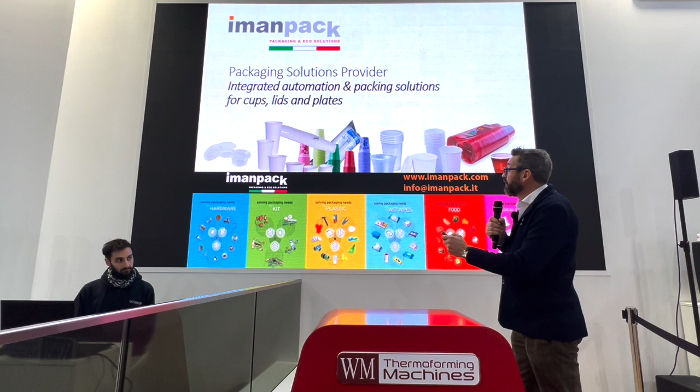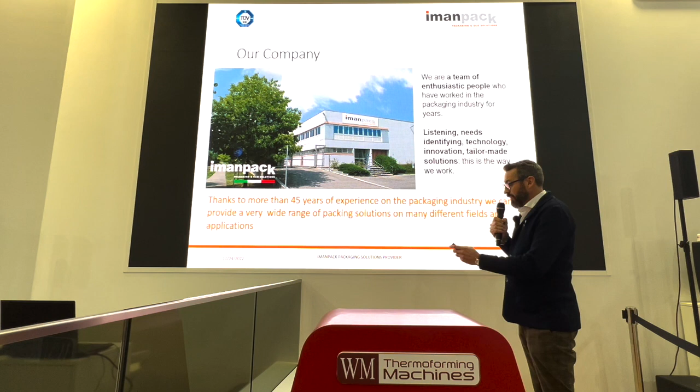We have quite big experience on packaging fields. We produce machinery for packing. We do about 60 different machines and we have more than 45 years of experience on packaging industry. Very wide experience in different fields, from food to plastics, cosmetics, wet wipes, hardware industry, automotive, chemicals, and so on. We are really verticalized.

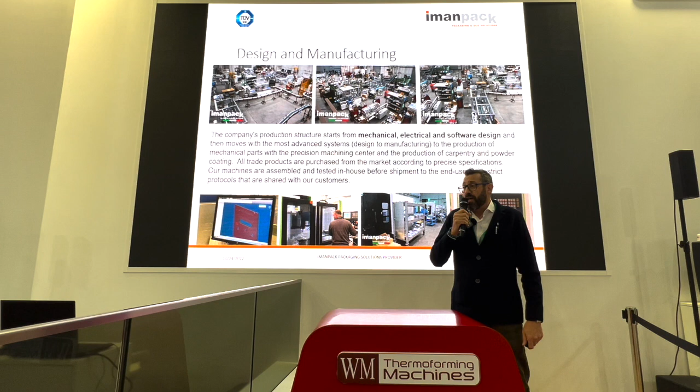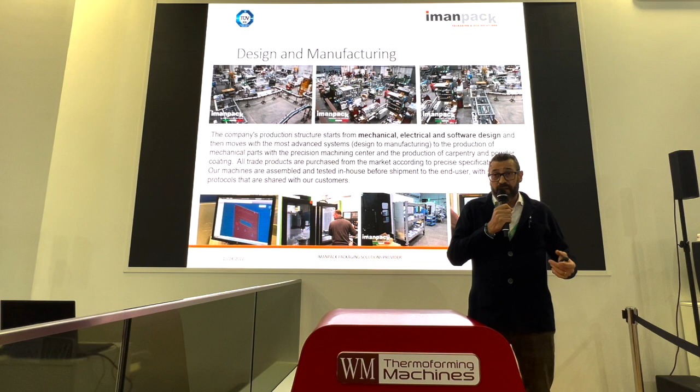It means that we do from designing to manufacturing. We have manufacturing facilities, CNC centers, laser cutting, bending, painting. And we integrated many technology related to manufacturing and design, directly from 3D models to design to machine with CAD/CAM systems. This is the way to improve our quality, to reduce the time and lead time of the parts and controlling them for higher quality of the parts, or quick feedback, because we do many customized solutions.

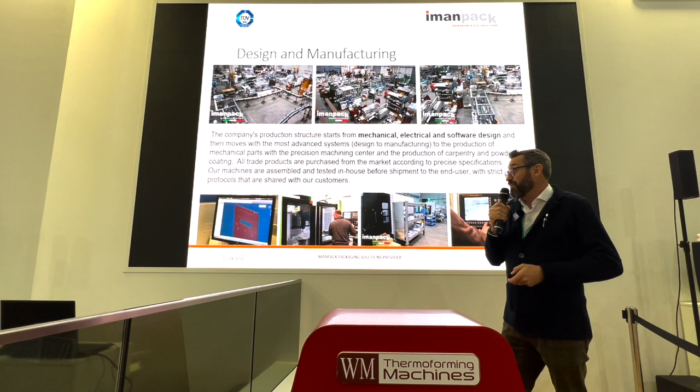We are ISO 9001 certified, following strictly related procedures.

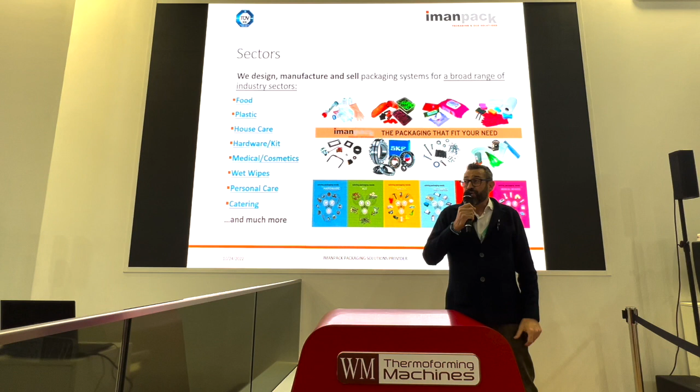And these are some examples of specific industry that we are involved in. So from food, plastic, house care, hardware kit, medical, cosmetics, wet wipes, personal care, catering, and much more.

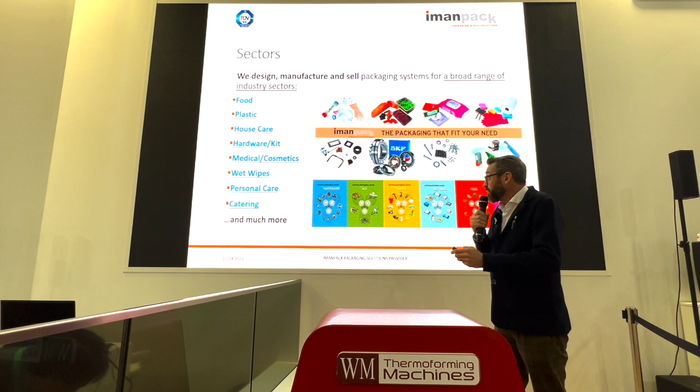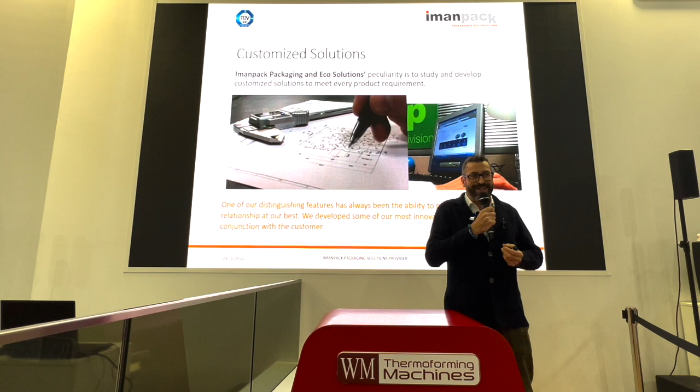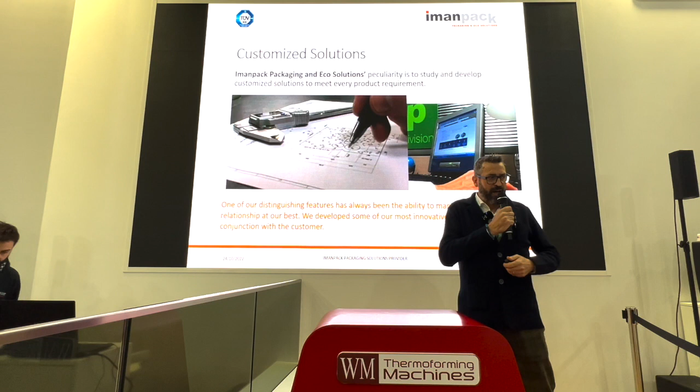As I told you, we do many customized solutions because after 45 years of experience in different fields, there are some standard solutions, but packaging at the end starts from the product itself, and then we study a specific solution related to our customers and their needs, so we work hard around the product itself, how it comes from the production lines up to the full end of line and palletizer.

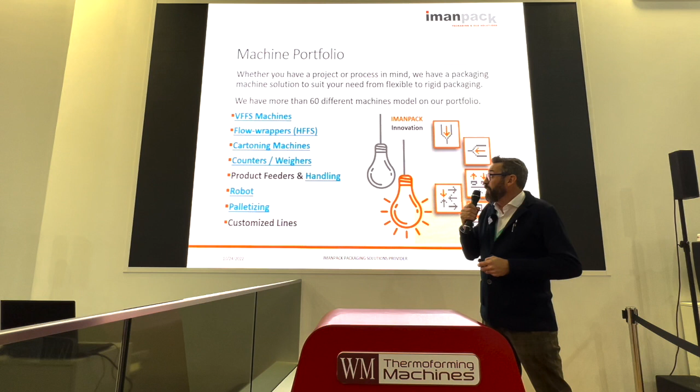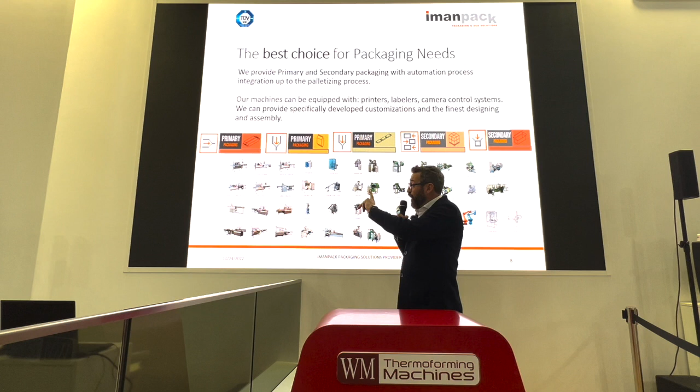So we produce vertical fill and seal machines, flow wrappers, cartoning machines, counters, weighers, all related to product handling, feeders, robots, and palletizers. These are pictures of the whole range of machines that mainly go to what is called primary packing, that can be with flexible film, to secondary packing with cartoning, up to the palletizer.

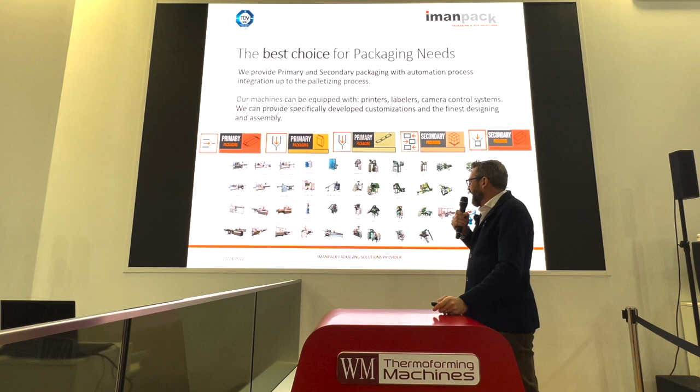This is some example of names that we serve from industry, different industries.

We have in our network 58 agents around the world, and we spread our presence in the market very wide.

Imanpack headquarters is in Italy, in Schio, Vicenza. Then we have one branch in France, and then we have Imanpack North America. So 58 countries, 2 branches, and then of course there is a specific department for process and after-sales service.

For technical support, scheduled maintenance, information, and so on, after-sales service is particularly focused on our machines because they need to work in industry 24/7 always, so it's important to get the right feedback on the machine with planned maintenance, technical service, upgrades and options, and technical expertise that gives suggestions for maintenance and timely interventions.

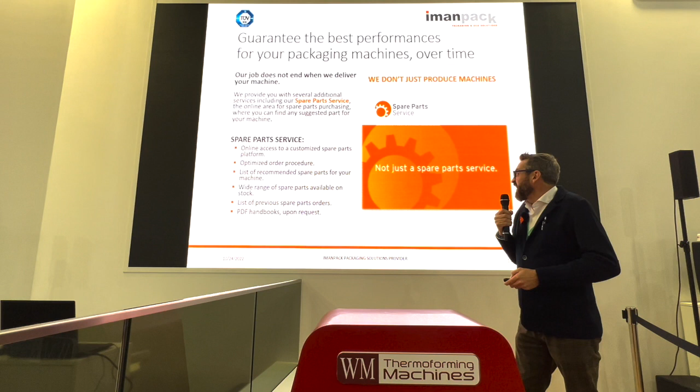And we have also a shop online on our website. Every machine is connected through Ethernet ports and is connected to our service center. And then the machines are equipped with a QR code. When you scan it, the customer can go on a specific web page where you can see all the spare parts available and can ask for a specific intervention dealing with our experts. That's a resuming of the spare parts service platform.

What we say is we have what you need because the variety of application that we have gives us the experience to suggest you a possible solution. This is why we call also packaging and eco-solutions.

So again, our intervention is on primary packing, secondary packing. We can do different kinds of packing like singular, multiple, working with different materials, different films from polyethylene to polypropylene, POF, and so on.

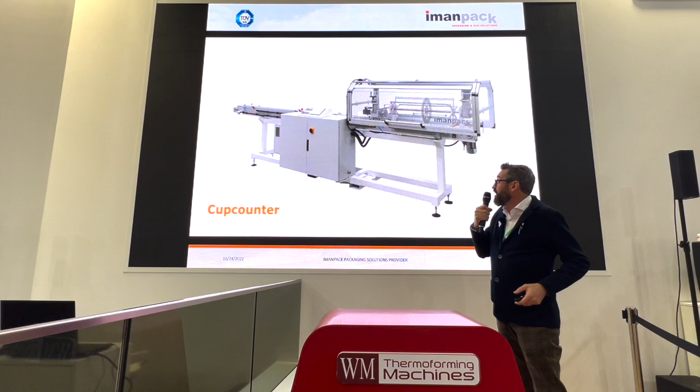That's, for example, the cup counters, so we can pass through all the products and count precisely the number that are into the bag, and connect with the further step, which is flow wrappers to make the primary bag. Machines are very flexible, wide range of products.

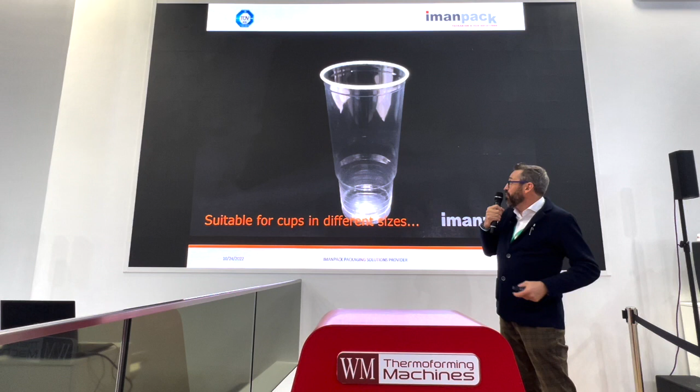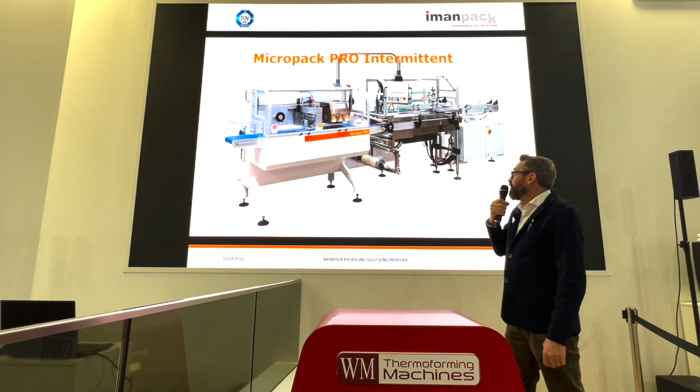Mostly we start even from very small product dimensions to middle-sized products. High-precision counting is requested in this market and is flexible for different ranges, different dimensions, very small ones and big ones for the cup, even different materials. This, for example, is the flow wrapper models, all servo controlled.

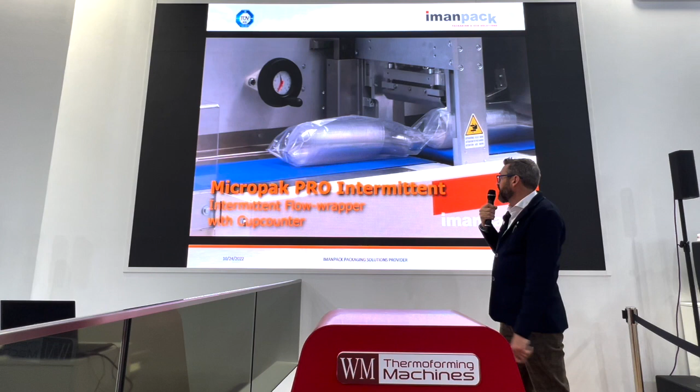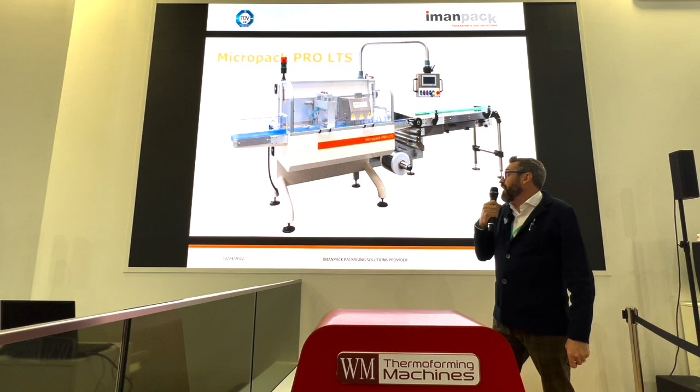Making the bags, generally flow wrapping is we wrap around the film, we seal it like a tube, and then we do the bag in transverse sealing and packing. That's the next stage of production capacity requested.

The principal concept is always the same flow wrapper system. We can work low density, high density polyethylene, we can work CPP or polypropylene. The matter of different materials means that we keep the machine with a specific sealing device for the wrapping material.

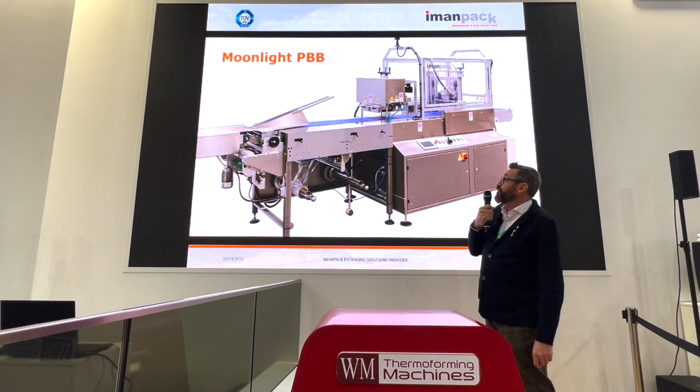Next stage is related to the higher speed machine that goes further up to 150,000 cups per hour capacity. We call it moonlight flow wrapper.

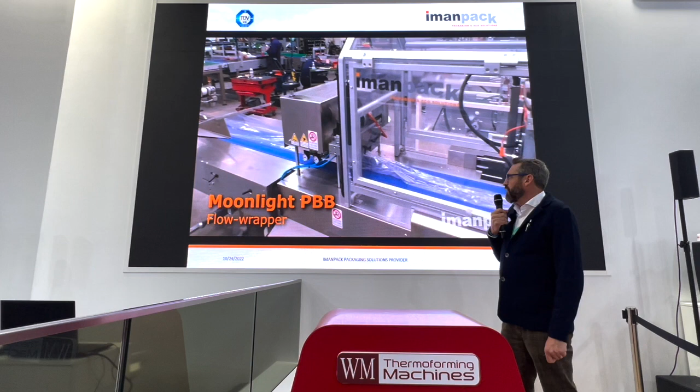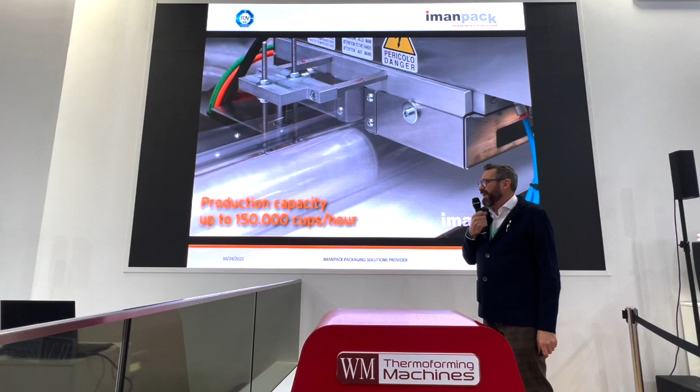Usually we work always from bottom feed machines, as you have seen, to carry the product, always connected to cup counters. The concept is always the same, it's just a matter of having different production capacity, so speed at the end.

You can see an application of 80 packs a minute.

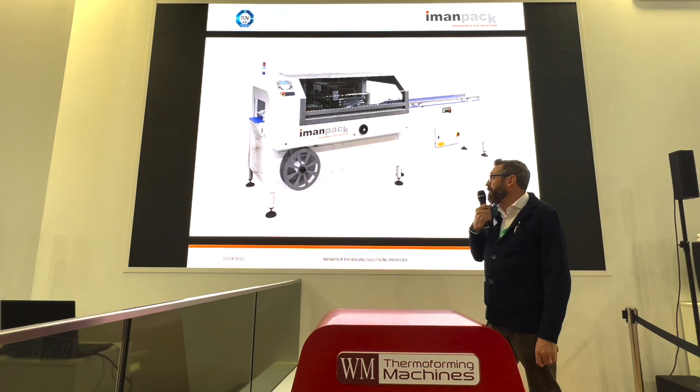Designing a line like this sometimes means also studying backup lines, so we do merging of more lines. This is another example of application, a wider machine for a bigger product, when we do multiple stacks together in the same bag, up to 5, depending on the dimension.

It's an angular packing machine, an L-sealer. So we can count precisely the singular stacks and then merge into 5 and make the bag accordingly as requested.

In some cases we also did POF wrapping material and then a shrinking tunnel to get a very, very tight pack.

Machines can, of course, be equipped with different options and devices depending on the project, depending on the line, going for multiple lines of packing. So we have stacker systems to merge different lines, like doubling width, and increase, for example in some cases, the capacity by having more cup counters on the same line to increase the speed.

So we are quite open and flexible to find a proper solution, and again, we have what our customer needs. We follow precisely the product, we take care of exactly what the customer needs at the end.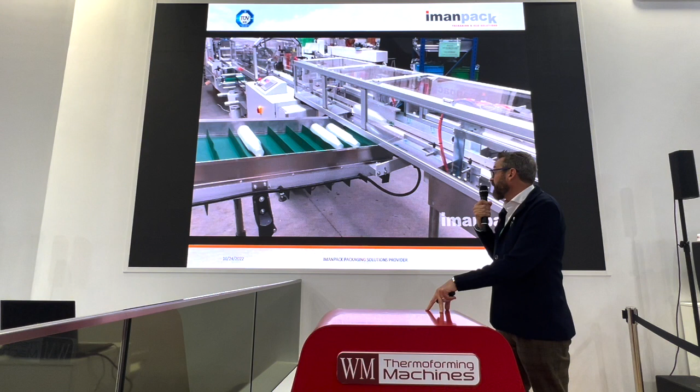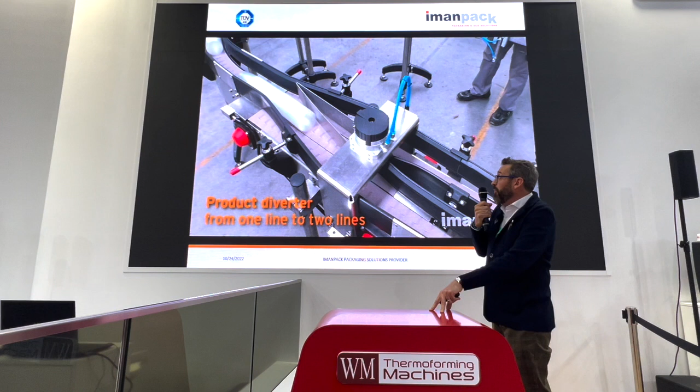That's an example of connection between different lines, main line and then backup line packing, or to increase capacity. This is a diverter, for example, that we designed with photo sensors that detect the length and accordingly divert to different lines.

For specific products, we have specific sealing devices designed, and in some cases we also have specific counters that can handle very difficult products.

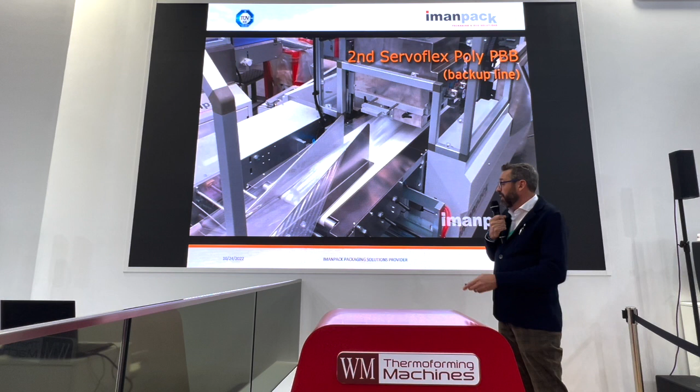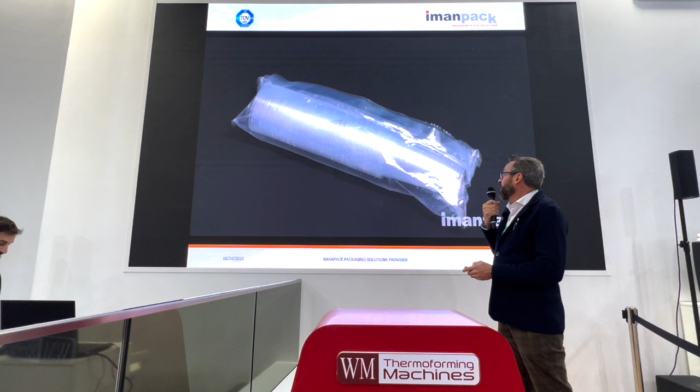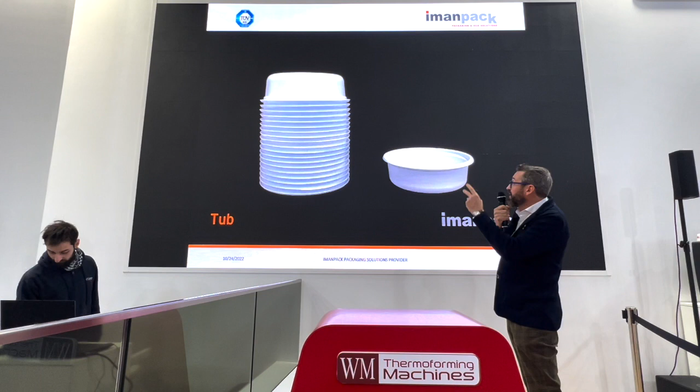For example, this is a special counter to keep all the products stacked, like a tub or small cup, small diameter, where the ratio between diameter and height is critical.

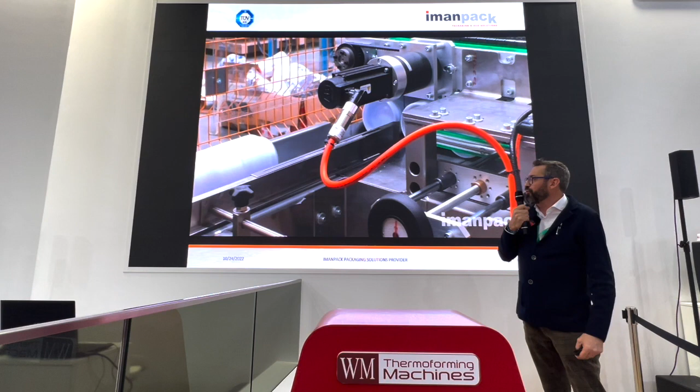We can handle preventing products from falling and keep them all standing up to go through the process, like a sauce cup, 60 mm, where the height could be 30 mm or less, packing precisely and then going to the packing stage.

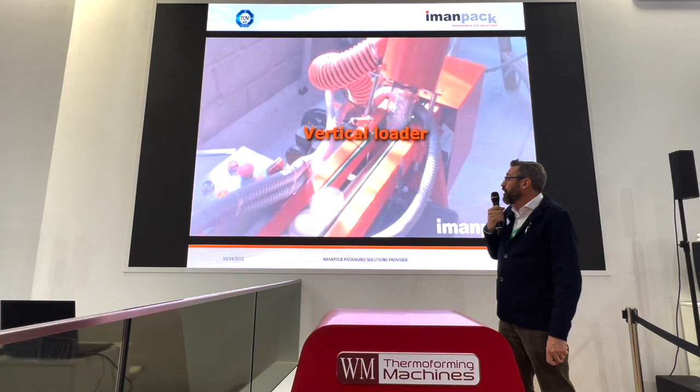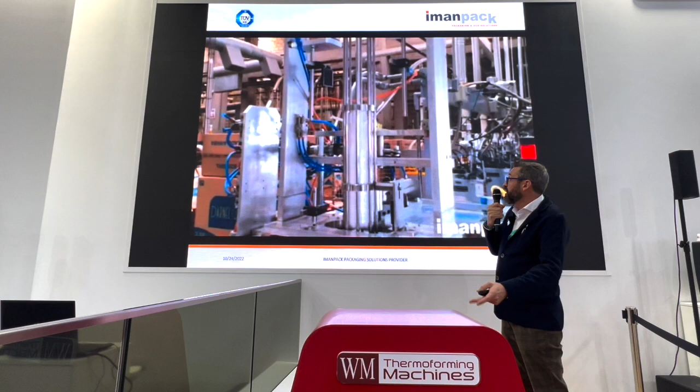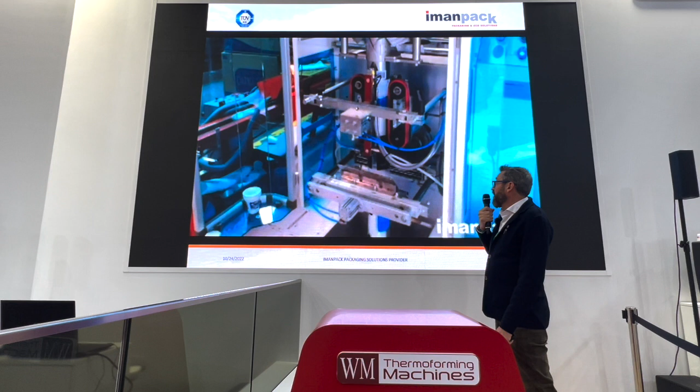This is another example related to EPS and paper, a different industry, just getting the product in vertical, counting and packing in vertical by a vertical form fill and seal. The footprint in this case is very small, so it can occupy very little space.

These are some connections to thermoforming, from inclined to straight, studying exactly the right handling system.

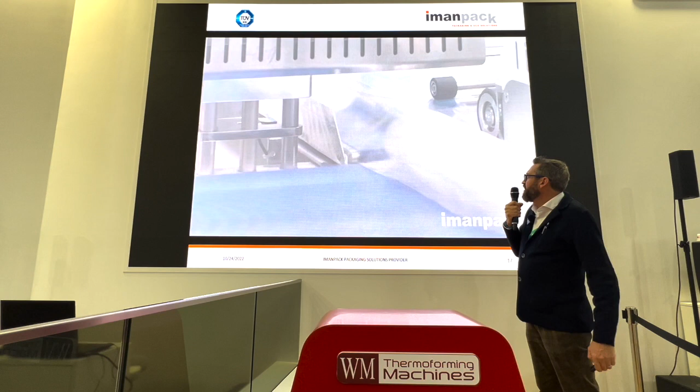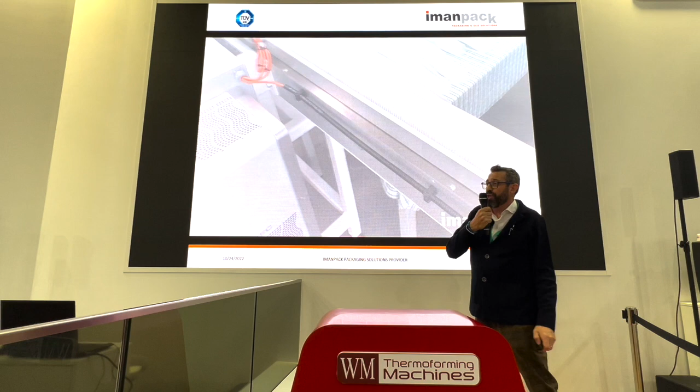I'd like to pass to another kind of products which are coming from a machine that is not the thermoforming—sorry, not the tilting machine that's usually the machine most used on the cup packing, but going for plates and lids.

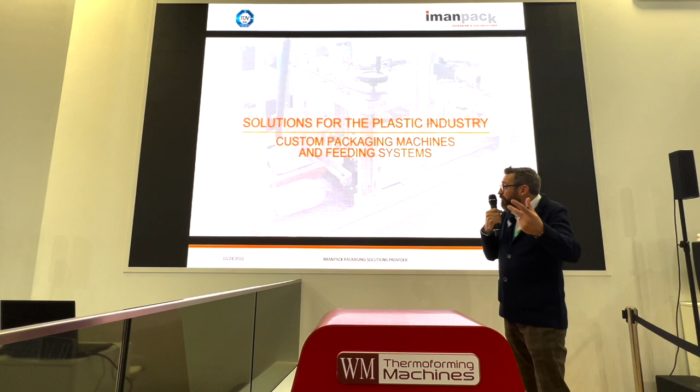So yeah, plates. We can study solutions for plates. We studied many solutions for plates, trays, and lids by a number of stacked products coming from the forming and cutting machine, usually starting from conveyors, connecting the conveyors of thermoforming to our conveyors, making a buffer, then singularizing and packing into a singular sleeve.

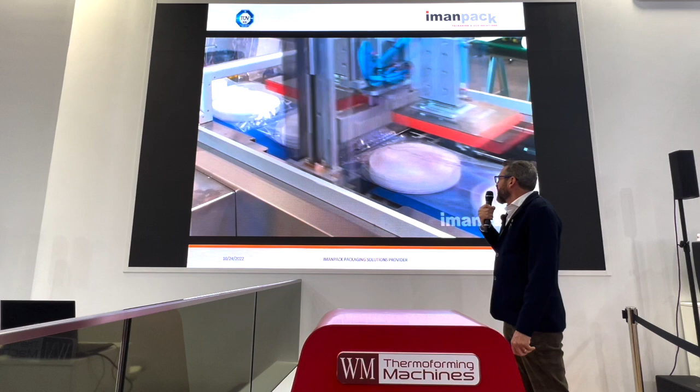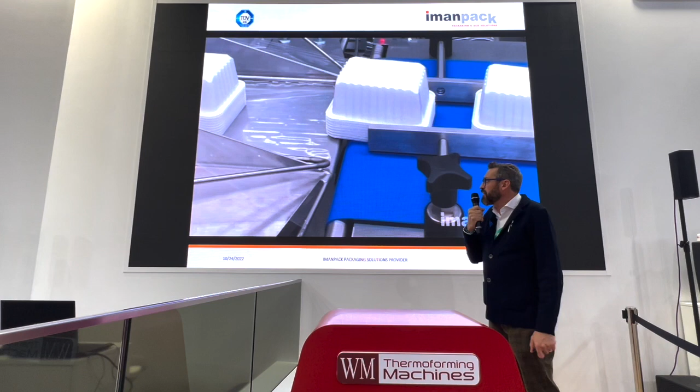Machines are, let's say in this case, bigger. We have about 15 different models of flow wrapper that fit different product dimensions. We can work for different film materials at different speeds. Most of our machines are fully servo controlled, so very flexible. Through the HMI it's quite easy to operate the machines and control the whole process. Changing from product to product is quite easy—just a few regulations and setups and they're ready to work with different products, so need to be very flexible.

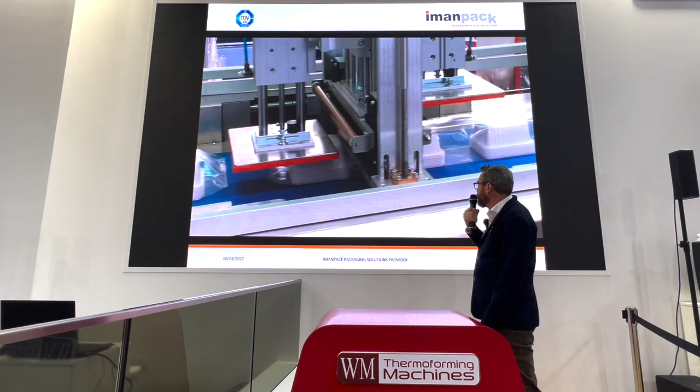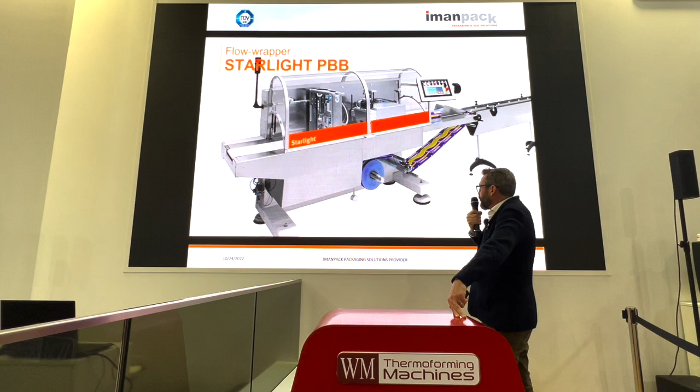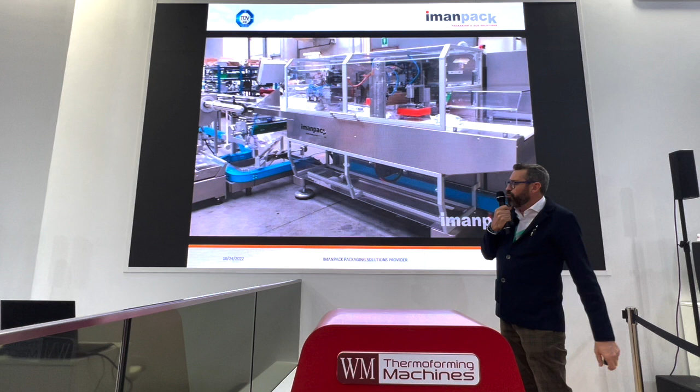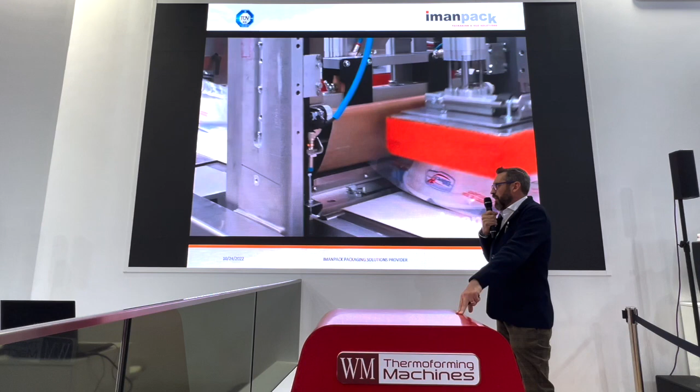This is an example of a tray. In this case, we can also have orientation from the front part that goes to the packing. This is the highest speed packing machine. It can be equipped with automatic splicing of the film, so never stopping the machine, depending on capacity and layout requests. We design all the handling and conveyors for the packing process, so it's mostly a matter of choosing the right solutions that fit the customer's needs. What we are showing is a box motion system for continuous packing without stopping, achieving high efficiency on the lines.

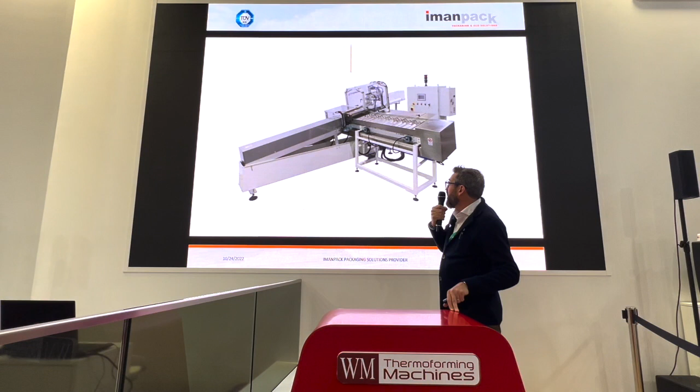That passes through lids packing, what we call the lid pack machine. That's the first approach we had to pack lids. Lids are quite problematic to pack because of the stability of the stack or the product itself. This is an example of packing lids by a semi-automatic system through conveyors that fit the products into the packing system. The machine is inclined 15 degrees, but we can also make a variable degree, 20 or 30 degrees, depending on the product itself and how it's best handled.

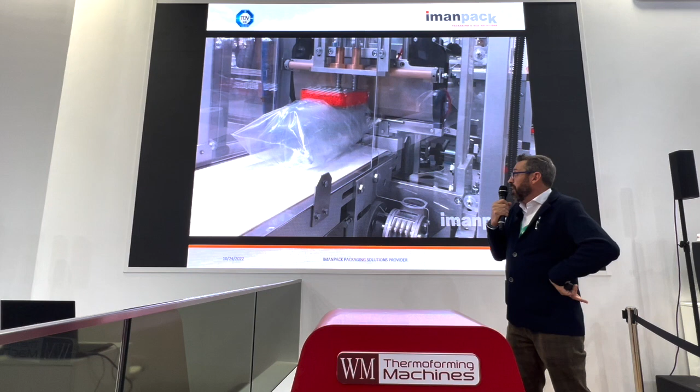This is a typical example and approach we did that comes from another industry. For example, we transferred the technology we found in the food industry used to pack slices of bread to prevent the product from falling, and then we moved this solution to the plastic industry.

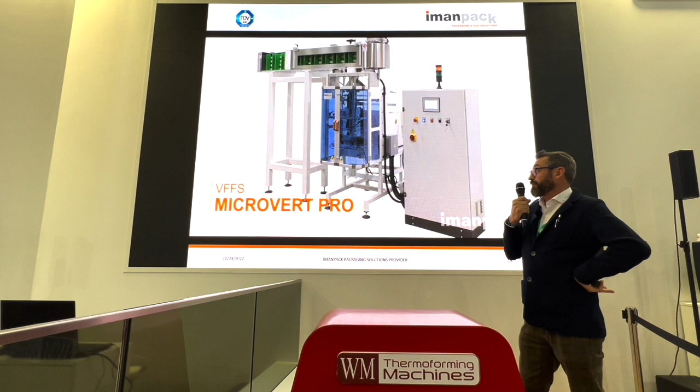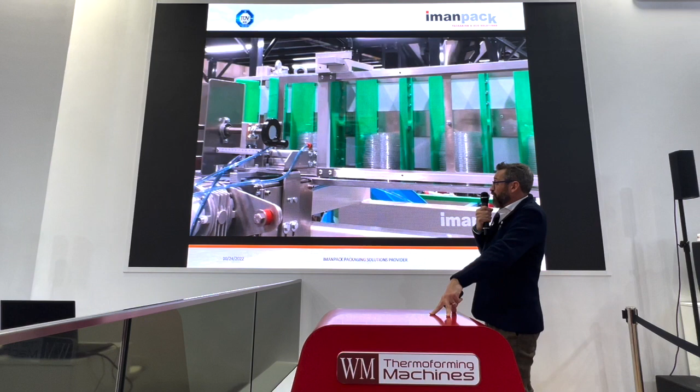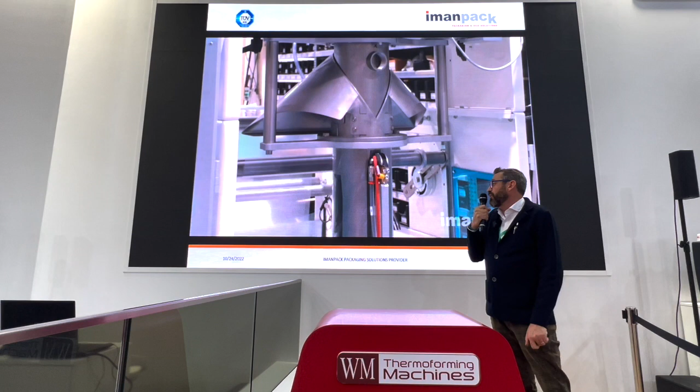So that's for dome lids or flat lids. That's another example of a solution for lids, folding the product from a higher position, connecting conveyors to the thermoformers, bringing one by one the stacked product to sector conveyors, then dropping into a vertical form-fill-and-seal machine, making the exact number of products into the bag. Can be 50, can be 100, depending on the number of drops. Very flexible, small footprint.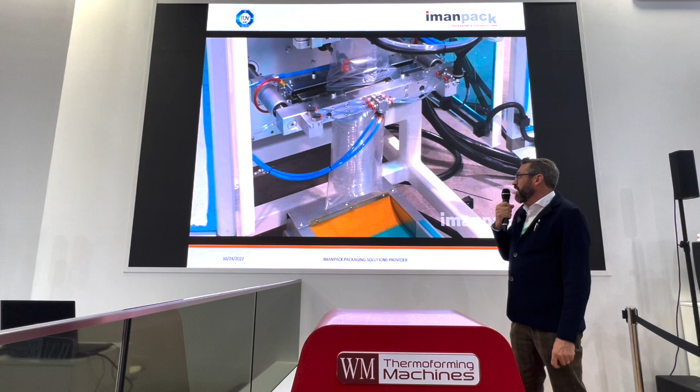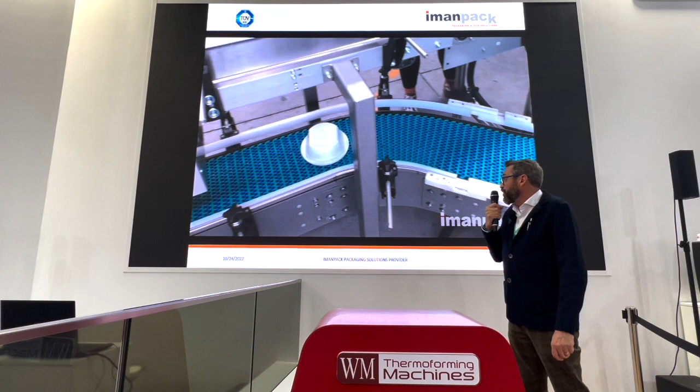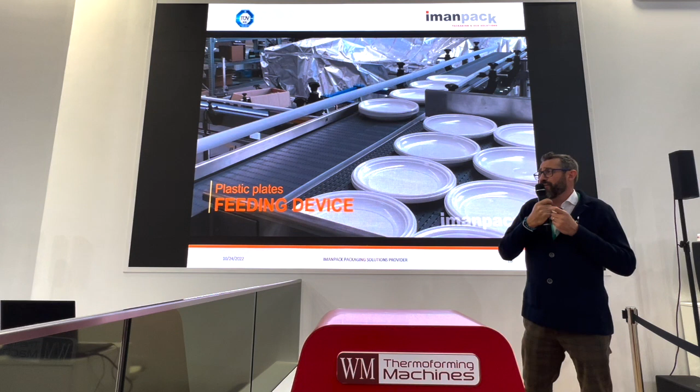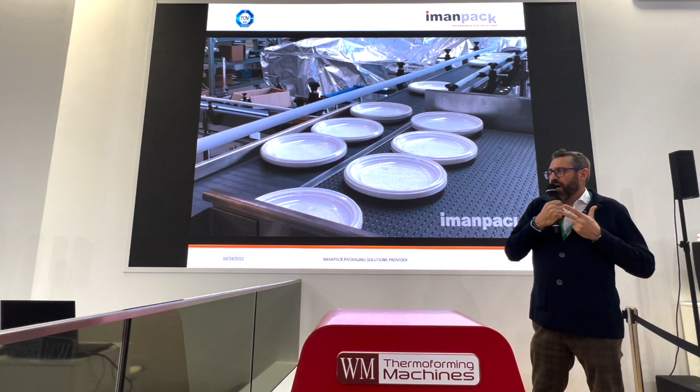Usually considering everything related to skeleton management for the grinder, we move with conveyors to another area, and it's quite flexible for different diameters with all side guides. This, for example, is a system to turn the products 180 degrees to get much better stability of the product itself. You can imagine some bowls have a very small base and a bigger mouth, so we need to turn it to get stability. It depends on how the molds come, how the products are produced, and how they come out from the thermoforming process—so we can have it straight away, or we can turn it 180 degrees.

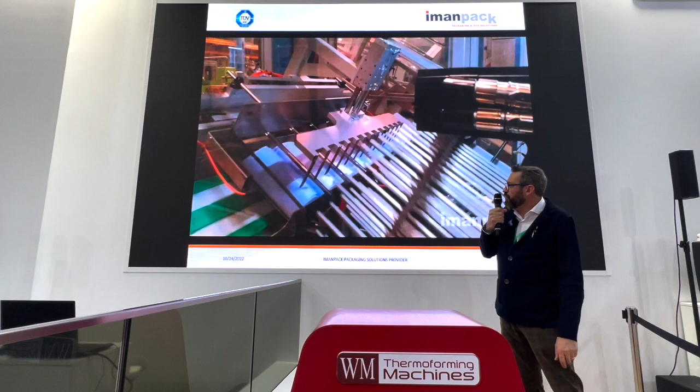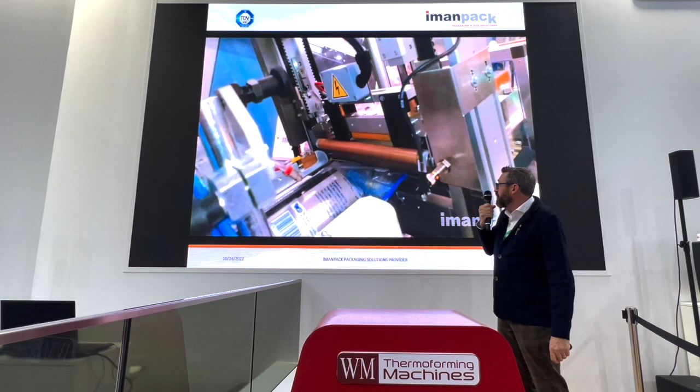This is an example of a fully integrated solution together with WM—420 flat lids. They discharge the product into our conveyors, and then we do the packing with the same system, 30-degree inclined, continuous, packing into singular sleeves of 50 pieces each. We recently developed this further, with a fully integrated system also working with very small diameter lids and caps—we're talking about 60 mm diameters. So, 40 years of experience, specific in plastic disposable packing, but also in many different industries, and this led us to give our customers what they really need.

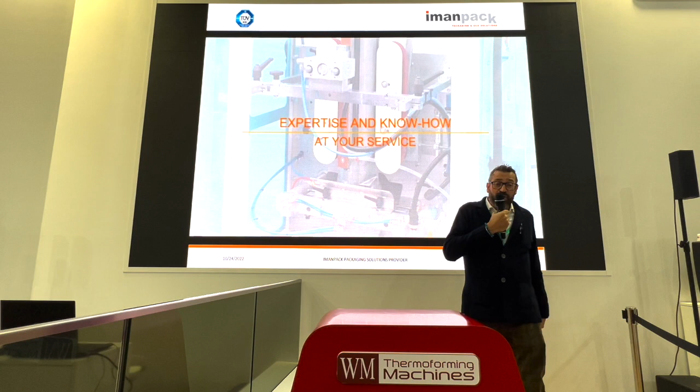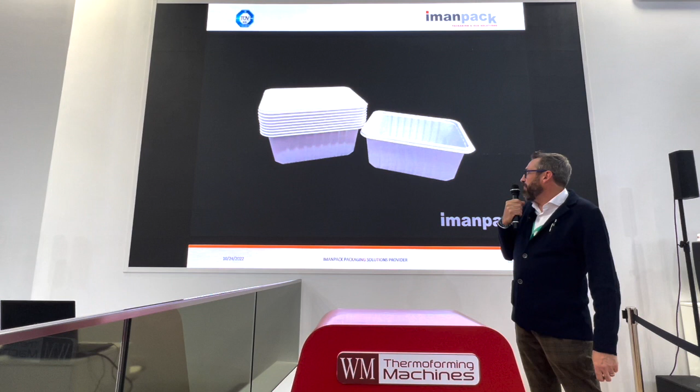Different examples of products that have been packed in our machines, and the results that come at the end.